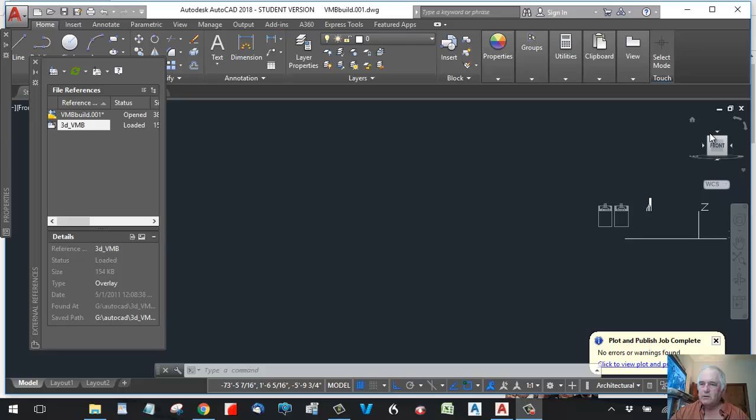Okay, this is going from where we left off, which is where the VMBs were situated. This here is a pre-completed stagger. I'm going to try to duplicate it without causing too much confusion to you.

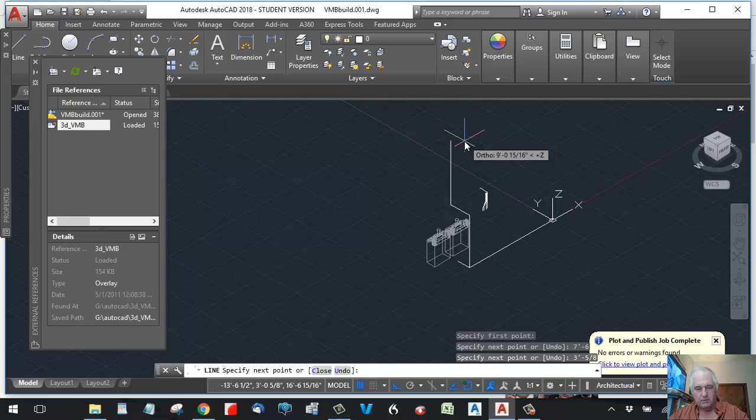One of the things we do first is create a reference line. We go how high we want to go - 7 foot 6 inches. And we want to go back this way 3 foot 5/8 inches. That's where we're going to be bringing our verticals up. Not in that particular X position, but that's where our height and our Y position is.

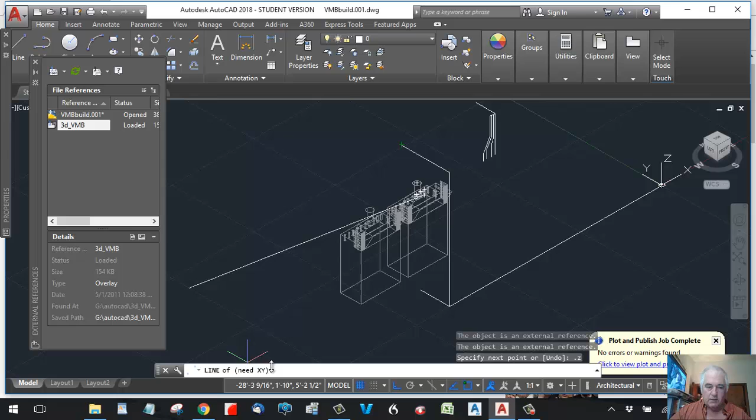So anyways, we'll start with this instead of just slamming it in there. Let's go and make a line from that, and we were going up, and we use a .z command. These are dot commands, but they're called filters. .z - what it does is it asks for a line, so I can choose this or this, doesn't matter. It's the height I'm looking for, z. Then it wants to know the x, y. So you go back to the source and click on it. And see, it is at that height.

Now I want to go to the north, and I will use the .y, and it'll ask me for a line, and I want to choose the end of this, and then again the source of that line, escape. So that's that. That's our first line in position 8 in this case.

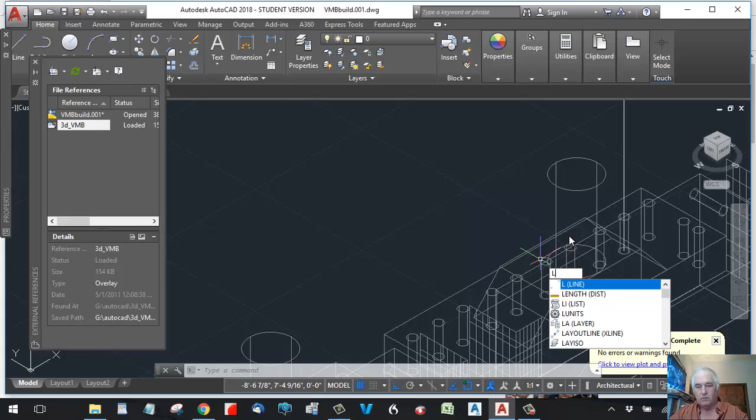Now I have a bunch of what I did. I knew this was 5 inches, so I'll make that one 5 inches long going up. I also did some hash marks here, line from there to here. I want to do 3 lines, 1.25 inches long. 1.25, enter, 1.25, enter, 1.25, enter.

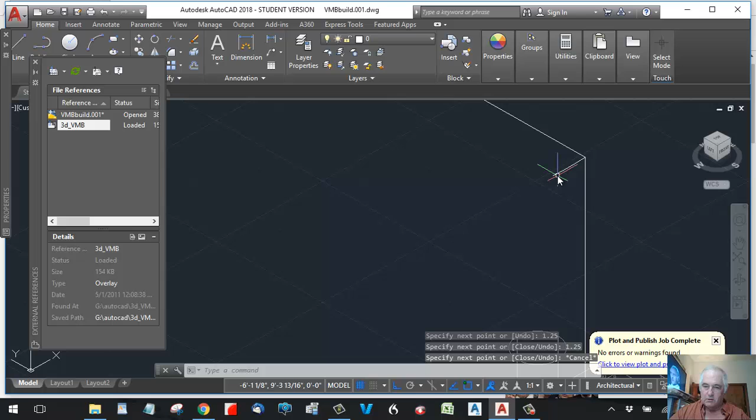So now we have the destination. There's one space, there's the other space, and there's final. So that's where they're going to go.

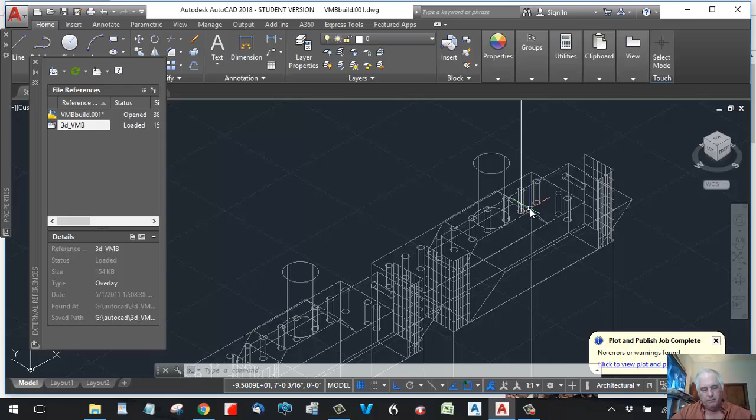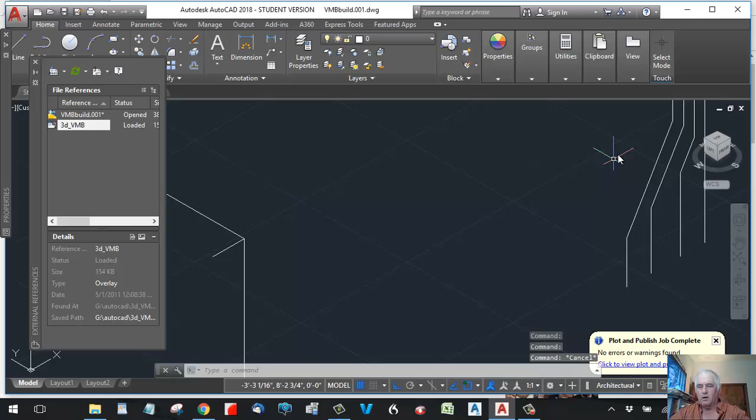And these measurements, I started at 5 right here and went over to here, measured that, subtracted the 3 1/4, and that was my offset, and 30 degrees was the bend right here, not there. 30 degrees, and that gives me my run, and that's the line right there.

And then this one here, the way you figure it is: if you were to draw a front view, if you were to draw a line - see this is at a 60-degree angle between here. That's a 60-degree angle, so you can figure from here to here, and that's your offset, and this is 60 degree, and this is your run. Same thing here, you figure from here to here, and again that's your offset, and 60 degree is your angle, and this would be your run.

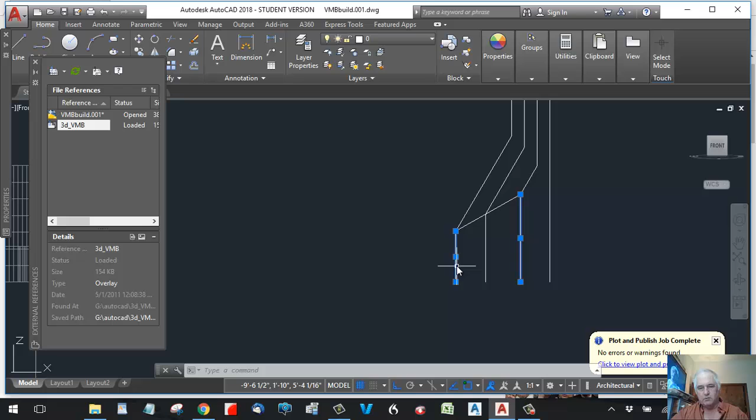You add that to whatever this was, which is 5. So you get a staggering of dimensions, and they're not going to be equal because these are not equal. So, but you want to have them kind of uniform. So anyway, from there you do math, from here to here minus an inch and a quarter.

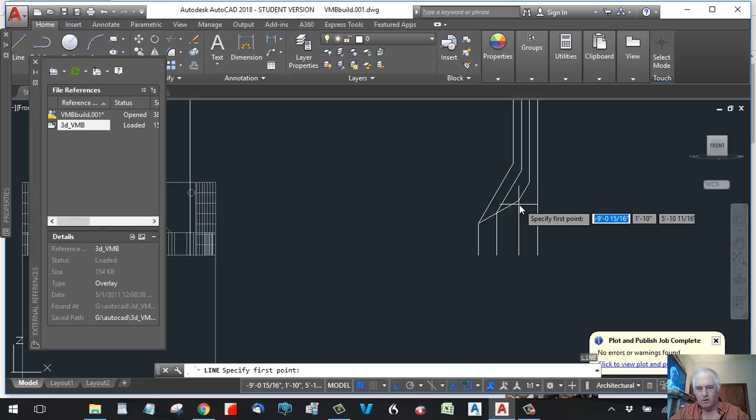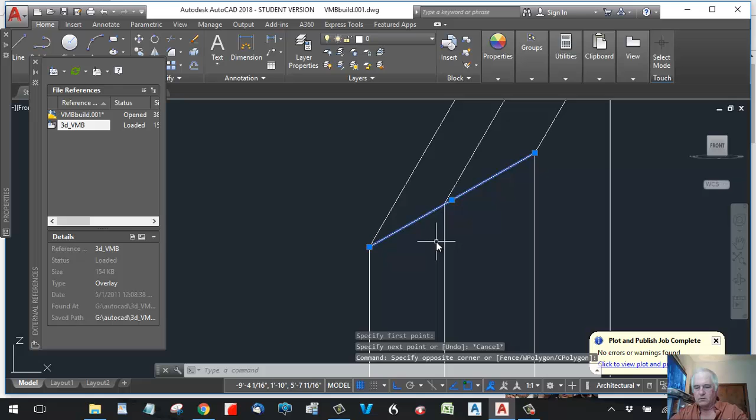That's your offset, and then you use this 30 degree, and you get your run, and you add those all up, and make sure you use good ink because you can screw up pretty readily.

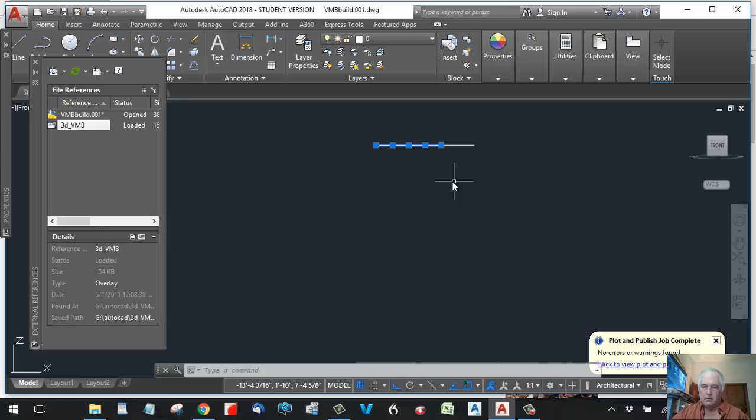Anyway, I'm going to take this out of here because I'm going to copy right in there. I only have that one dot up there. Okay, so what I want to do here is get rid of these midpoints.

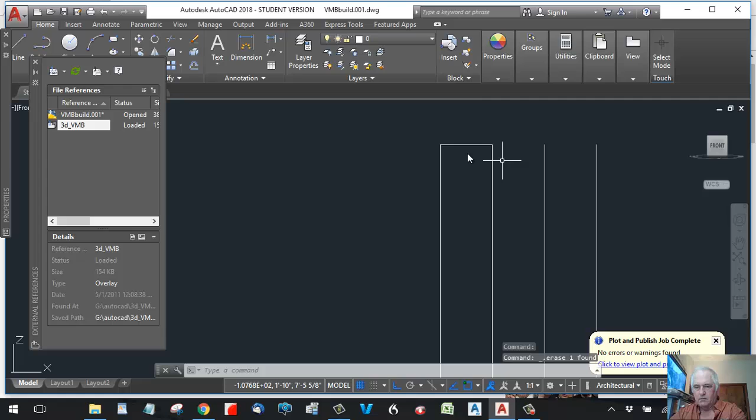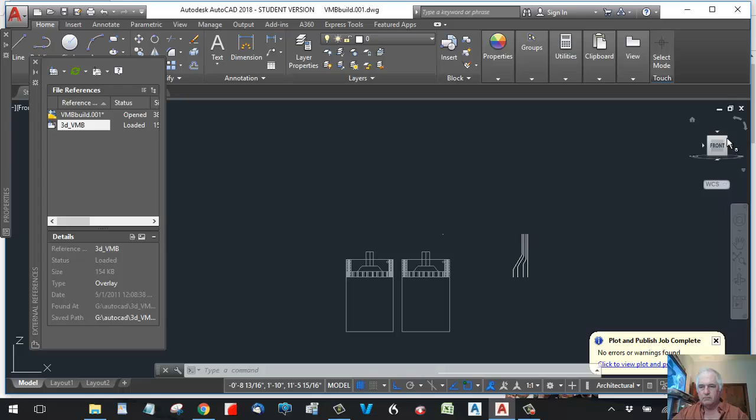Okay, so I want to make a mirror command. And since we're not on a flat plane, let's use a 3D mirror. So let's look at this angle. Okay, let's make a mirror right in here. So let's do a line up and over. Excellent. Here's your 3 points. So your 3D mirror,

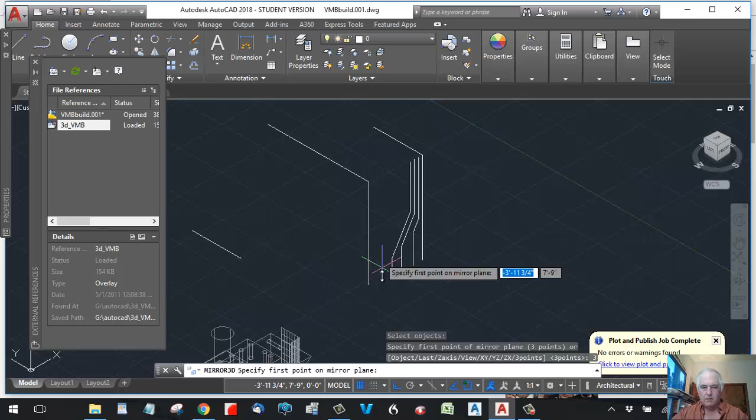it wants you to select all the objects. Okay, we have them. 3 points is the option. Then we do the 3 points, and we say, do we want to delete it? No. Okay, so here it is over here.

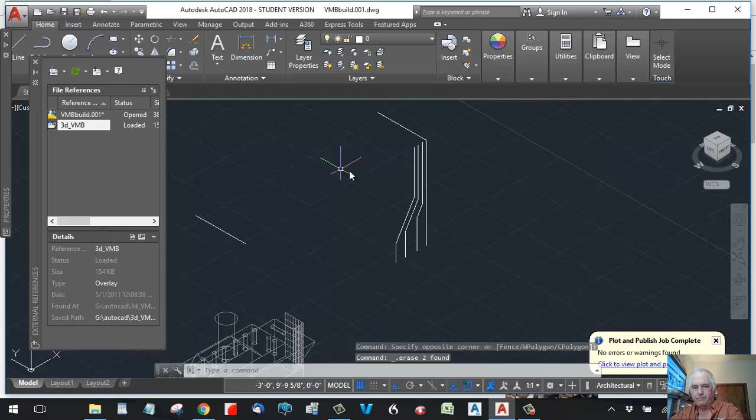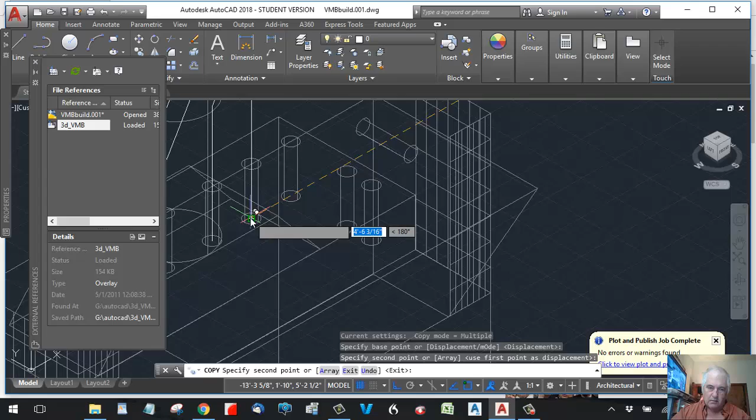Let's get rid of this. Now let's take these and let's do some, let's just copy. It's easier, just copy. We're going to need 2 eventually. One, we're going to place it right there. Next one, we're going to place it right there. Let's go look at the reversal.

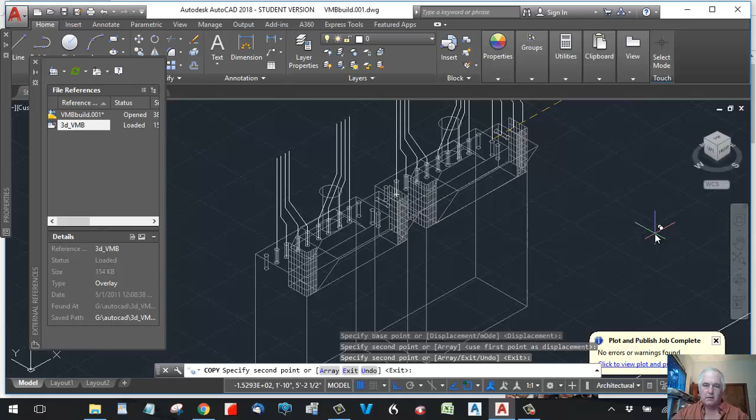Copy that. And let's see if we can place it there. And make sure you get the right one. There you go. That, get rid of that.

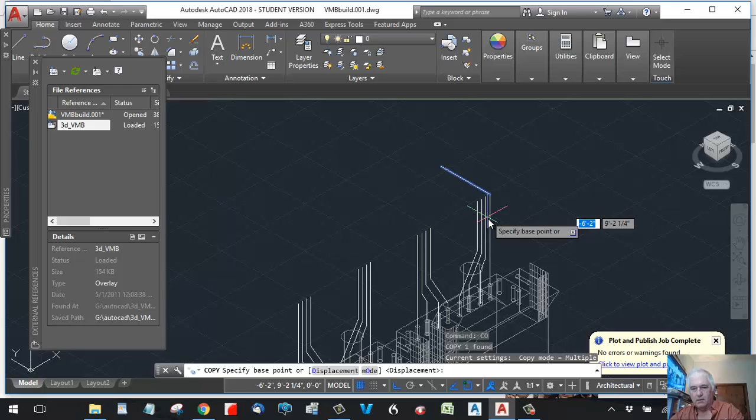So now we need - get rid of this too. Let's create copies here, copy of these, this line, and we're done. I could have made these all kind of at once, but it's not too difficult to drop them here.

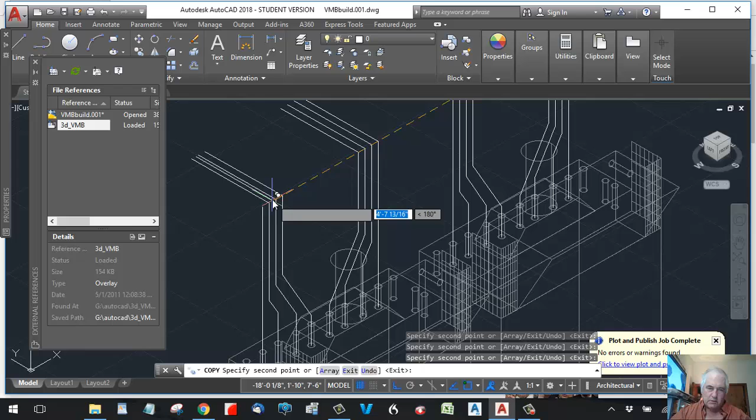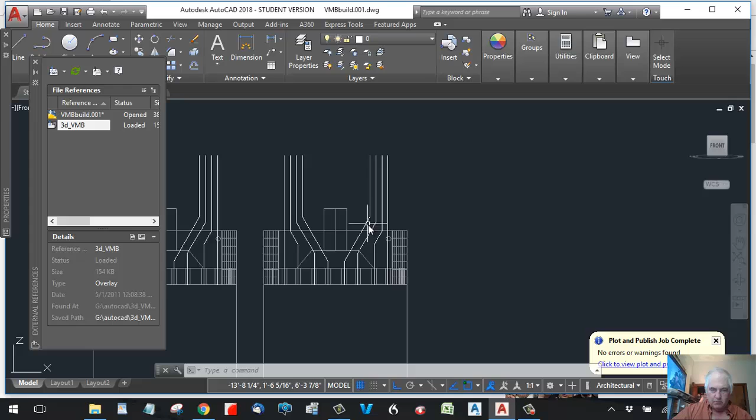And so we have a good start here. The VMBs coming out, let's take a look at the front, how they come out. Let's look more straight from the front. Okay, so here's where our vent will be going. So we are way clear of it, and these lines are pretty uniform. And we have our lines going back to where we go up.

And at that point, I want to stop and review this video. We'll go from there doing the other things, which is up.

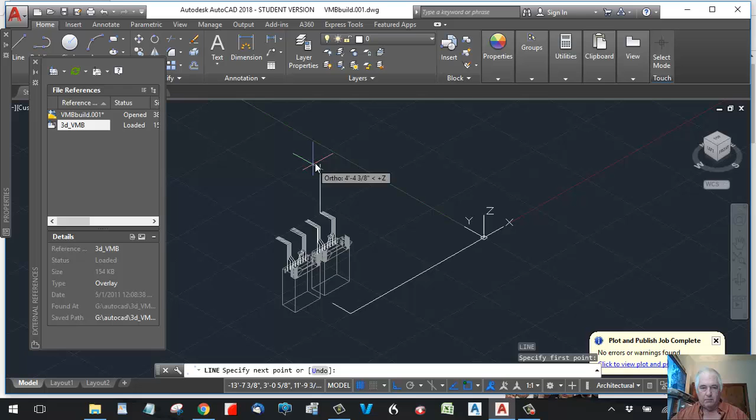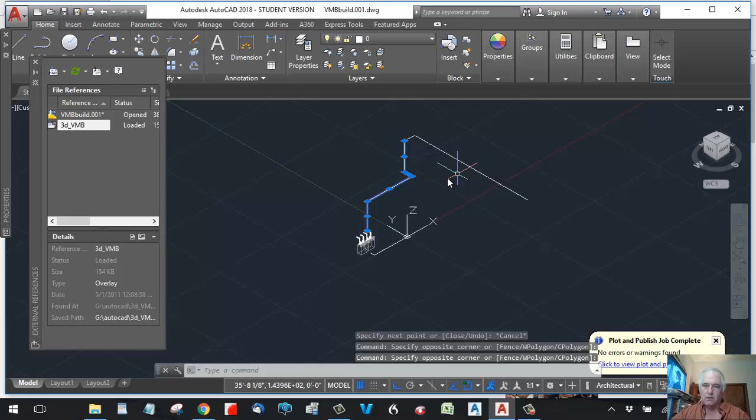And that should be not too shabby at this point. Let's see how it does.